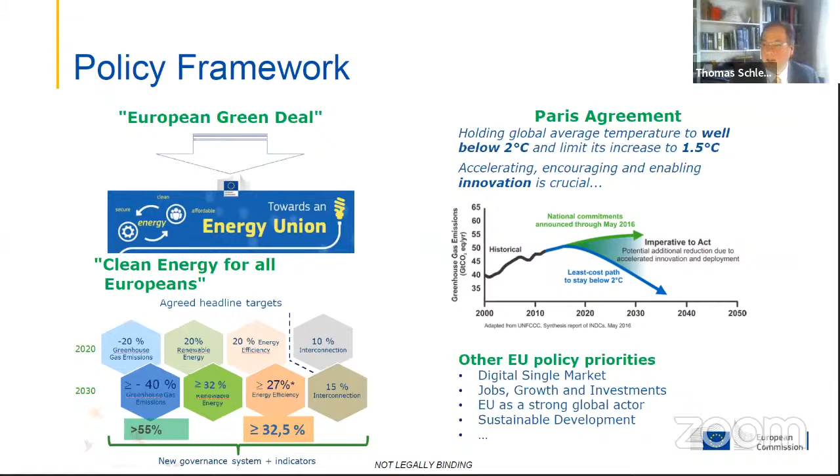I will not talk in detail about hydrogen, but of course, the European Union has a very specific strategy also in research and innovation on hydrogen with the Clean Hydrogen Joint Undertaking, and also bringing hydrogen in the global context. Recently, the Single Basic Act was decided. So please look at this information on the Clean Hydrogen Joint Undertaking and what the European Union does on hydrogen. Next, please.

Also internationally, there's now Mission Innovation 2.0. There is a specific mission on clean hydrogen now. What I will talk more about is, from the first phase of Mission Innovation, Innovation Challenge 5 on converting sunlight. And here the objective was to discover affordable ways to convert sunlight into storable solar fuels. A lot of countries teamed up to collaborate on these efforts. Next, please.

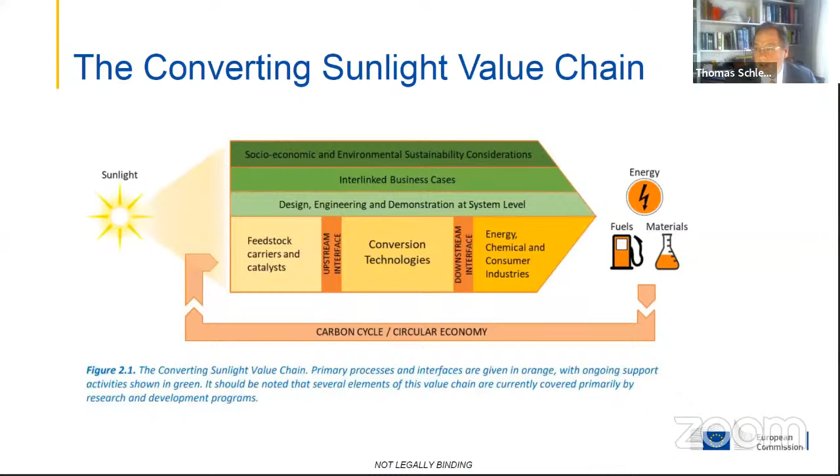And so several horizontal cross-cutting issues, and the increasing importance of carbon cycle neutrality and also a circular economy, also including resources and materials. Next, please.

The second study I would like to shortly introduce was a study commissioned by the European Commission about solar fuels research and investment. And this had the task to define the solar fuel value chain and to perform a techno-economic analysis of how research and innovation can contribute there. Next, please. I can only go shortly through that, but since you shared the slides, I invite people to look at that after.

Important: what are the investments needed? This is an important part in the roadmap, the importance of investments and also other policy drivers and important market drivers, like the carbon price. Next, please.

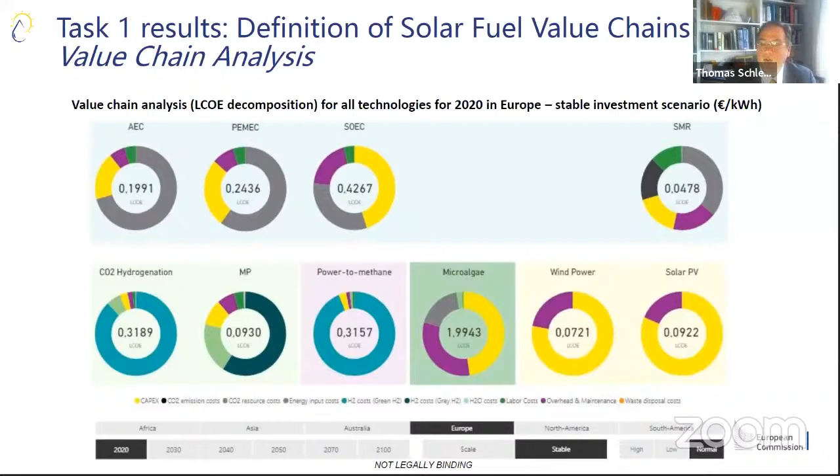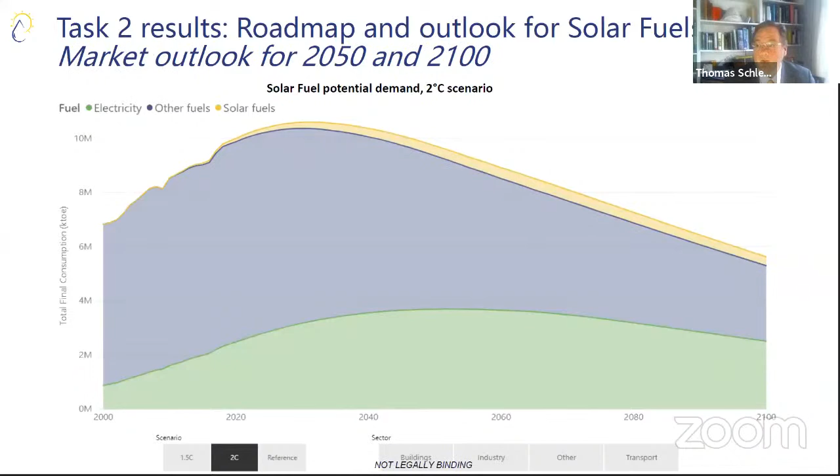Next slide, please. Now, very quickly, I think I'm close to running out of time, but very quickly about Horizon Europe, the current EU Research and Innovation Program. Next slide, please. If you think about solar fuels, of course, it is in pillar 2, where you have climate, energy, and mobility. However, please look also at other very interesting options like the European Innovation Council. Then, of course, there's pillar 1 with all, let's say, the bottom-up research, which is applicable to this as well. And you also have other actions in pillar 2. So please really look at what is available in the Funding and Tenders Portal.

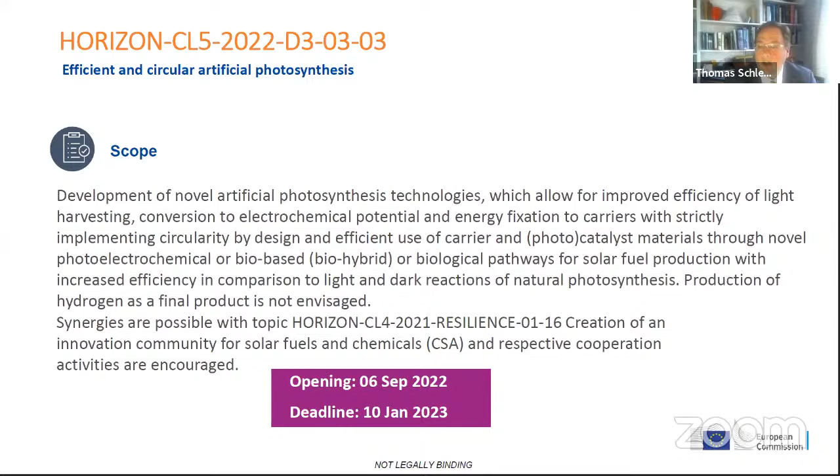Next, please. Only very quickly, there are 2 topics in this work program currently which might be of interest to you. One on efficient and circular artificial photosynthesis. This is a development, so lower TRL project. Next, please. And one on direct renewable energy integration into process energy demands of the chemical industry, where you've seen in the text that artificial photosynthesis is mentioned and direct solar thermochemical conversion as one of the possibilities. Next, please.

Thank you very much for your attention. And I hope I could give you a short overview that there's a lot of material you can look at to also see research and innovation and what the policies are at the European level. Thank you. Thank you very much, Thomas, for giving such a comprehensive introduction, and your keynote about what is happening and what you are doing to make sure that the right R&D pathways are followed in solar fuels and solar chemicals. So thank you very much for being here with us today and for your presentation.

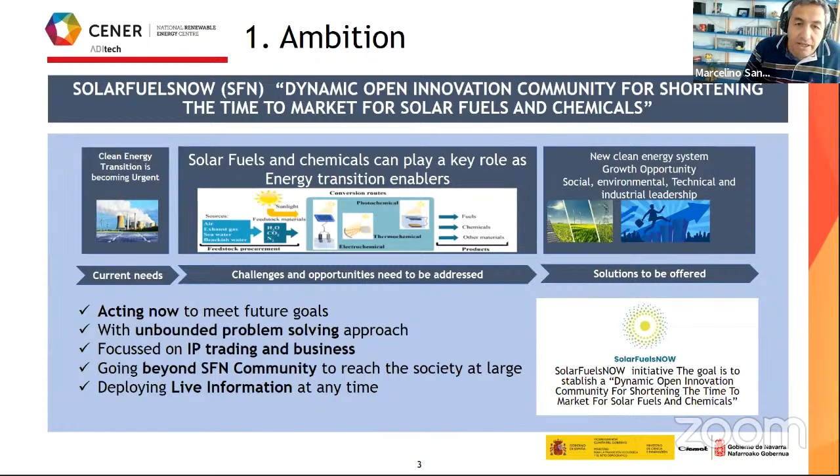So our initiative, Solar Fuels Now, will act as a bridge to connect this research with the final application and growth. In the end, this is the main goal. How are we going to do this? We will set up a large-scale R&I initiative with a dynamic innovation ecosystem through rigorous, inclusive engagement of all stakeholders. This is not easy, so we need to involve everybody to shorten time to market. This is important, and we want to achieve an actual impact of solar fuels in the energy transition.

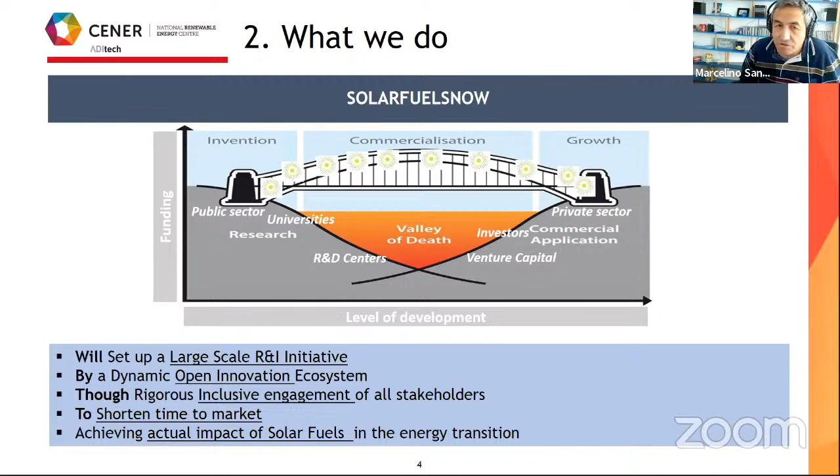And what do we expect from you? The truth is that we need you. The involvement of every player is essential for this initiative to work efficiently and to really convert this opportunity into business and leadership. So we want all of you, not only the speakers, attendees, organizers, etc., to be committed to our goals and share your knowledge, expertise, ideas, ambitions, concerns, and your view in the field. We need you to be the soul and the heart of this initiative.

We, as Solar Fuels Now, are just a catalyst to enable these open innovation activities. And we really appreciate you being actively involved in this first event. I want to thank you for coming, and I want you to enjoy this event, and please be active. Let us know your thoughts and try to bring added value to this initiative. Thank you very much.

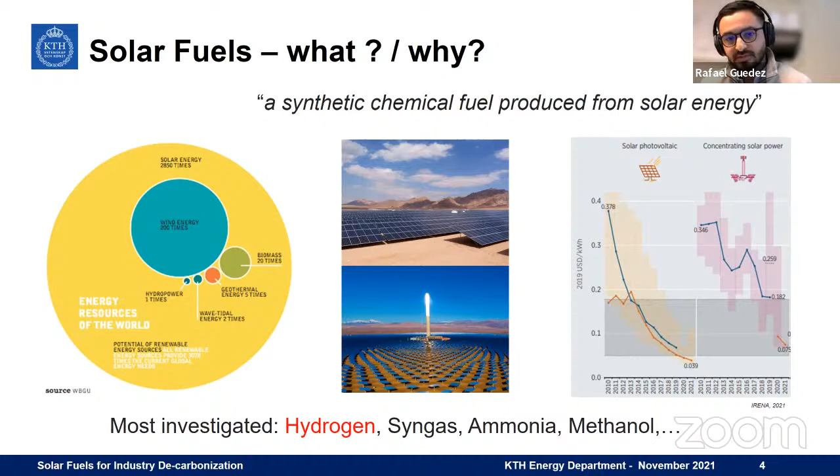And when I'm asked why we are looking into this, Thomas explained very clearly we need to decarbonize, and now we have very good momentum, not only because the amount of energy we have from the sun is enormous, but also because the technologies we have today to harvest solar energy are cost competitive, regardless if it's solar photovoltaics, concentrating solar, or direct sunlight use. Among the most investigated fuels, we have hydrogen, syngas, ammonia, and methanol. I will come to that.

So maybe the key message here is that should we move to a hydrogen-based economy, we need to not only look into decarbonizing the production of hydrogen, but also expand the demand and make sure we have more uses for hydrogen in industry.

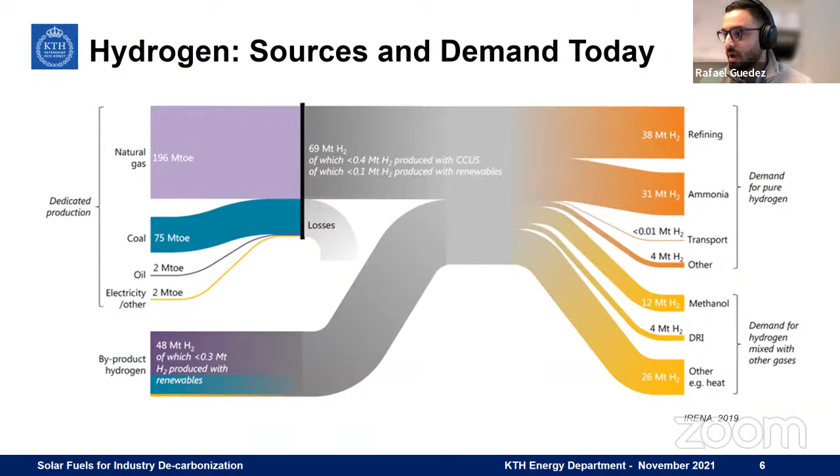However, having said that, we still see that fossil hydrogen will still be cheapest unless we change our policies or become more aggressive. The demand will increase, and that will be mainly driven by green hydrogen cost reduction, but also policies that need to happen to drive existing demand and new infrastructure.

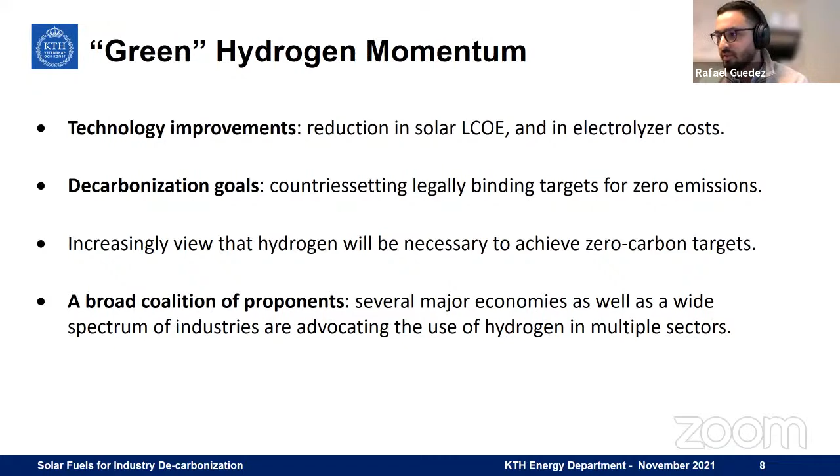Now, this has many challenges, like I already briefly touched upon. First and foremost, today hydrogen is still entirely supplied almost from natural gas and coal. Besides low temperature electrolysis, most of the other processes are yet immature, and we're going to need them, as I'll come to.

Producing green hydrogen is still costly, even from electrolysis, and it also requires vast resources - electricity, water, land, etc. So all of that needs to be addressed from a technical point of view. Furthermore, once we have green hydrogen produced, it is difficult to store and transfer, so we need a lot of focus on technology development in how to manage this.

And here is an opportunity actually for solar fuels, which can serve as a storage carrier besides being a final product itself. The development of hydrogen infrastructure today is also slow, and it might be one of the reasons why we're holding back adoption, even though some industries are interested. In order for hydrogen to be more widely used, we need to move from the typical use in oil refining and ammonia, and that needs to be driven by policy to drive demand and infrastructure.

Now, this is what I want to talk about mainly: how can we use hydrogen in industry? I particularly focus on the case of Sweden, which is our experience and background here. In industry, particularly in Sweden, we have a good example of how hydrogen can be used in the iron and steel sector as an energy source and as feedstock.

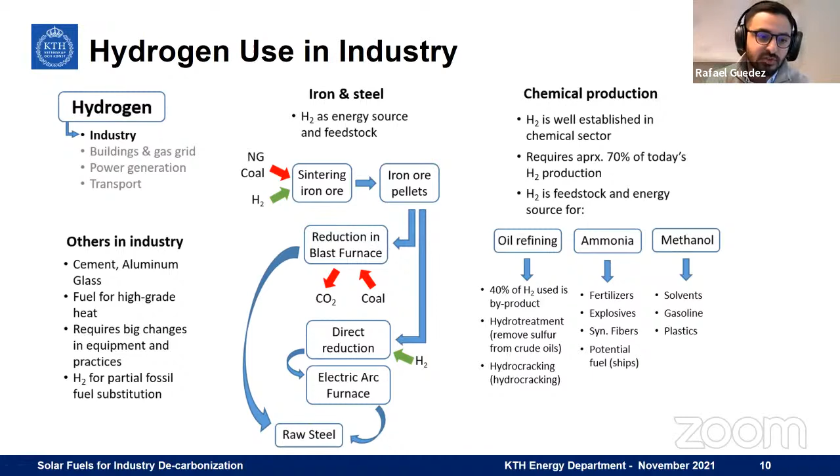Similarly, in chemical production, hydrogen is already well established, as I said, for refinery and ammonia. Today, what we see is that hydrogen can also be further exploited for ammonia, but also for methanol and other products derived from methanol. In other industries like cement, aluminum, and glass, hydrogen adoption is also possible, but they require high-grade heat. The one challenge we see is that these industries have already invested in their furnaces and processes, and changing to hydrogen requires big investment.

Hydrogen, besides potential use in industry, has an important role in transportation, and that's one of the key focuses. Even within transportation, I want to focus your attention on the different paths forward. One is clearly converting hydrogen through Haber-Bosch processes with nitrogen to produce ammonia, helping decarbonize the shipping industry. That plays a very important role.

The second path relies more on heavy duty and long haul transportation, not necessarily cars, since there it could be seen as expensive and hard to store. But in long haul and heavy duty transportation, hydrogen can play an important role. Furthermore, in solar fuels, converting to fuels like syn diesel or syn kerosene by combining with CO or CO2, we have the opportunity to decarbonize the aviation industry as well. These are sectors that can be transformed by the adoption of hydrogen if we move to more competitive solutions.

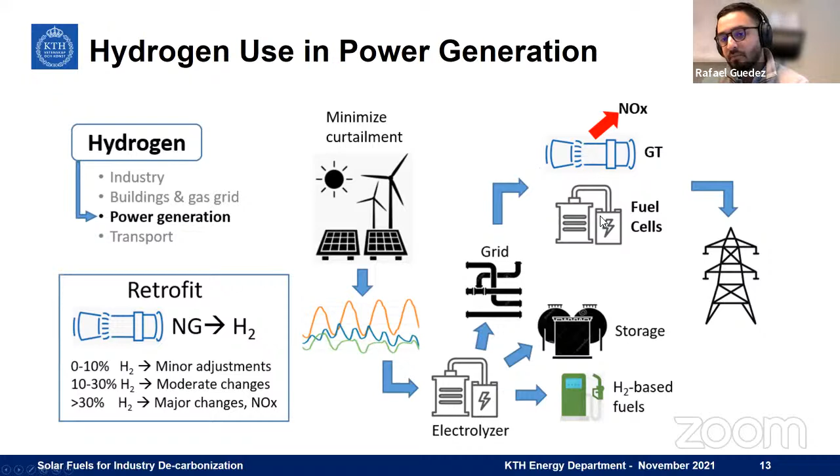With that picture, I want to come to this one, which is: okay, how are we moving forward?

Oh, I was kicked out. How strange, because we haven't touched anything. Go back, please—can you share again? Okay, I'm back, yeah, apparently.

In the case of Sweden, the example of steel is not the only one. I don't want to go through all of them, but different companies from the refineries and chemical sector, together with companies from the steel sector and the agriculture sector, are trying to adopt hydrogen by putting forward pilot projects leading to biofuels, synthetic fuels, and actual technologies for reduction of smelters using hydrogen in steel making, etc. There are a number of applications where hydrogen can serve to decarbonize the industrial sector, and companies are moving forward.

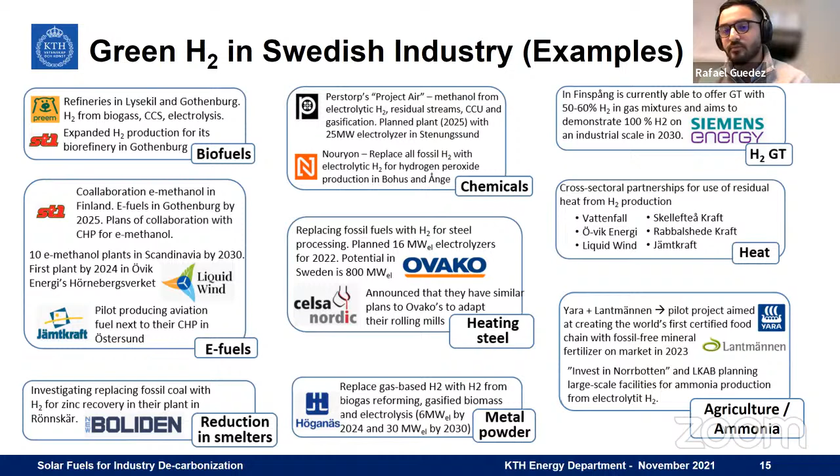So my talk was a bit of an overview of what we actually teach, but I wanted to give some key takeaways here: solar fuels can play an important role in decarbonizing the sector, especially transport and industry. Hydrogen is the most investigated solar fuel, but not the only one. There are many paths for producing hydrogen from the sun, not just electrolysis.

Many others are needed and could be more cost efficient depending on where we are and the resources available. Solar fuels are still costly, and it's hard to store hydrogen and transport it. This is actually an opportunity for solar fuels, perhaps to act as a liquid storage carrier.

By 2050, with the current policies that we see from different compilations of studies, green hydrogen can reach up to 50% of the hydrogen demand, and might not be sufficient. Therefore, we need policies and awareness to drive the adoption and techs sustainably.

Coming back to Marcelino's initiative, I think we need solar fuels now. I wanted to finish with one example.

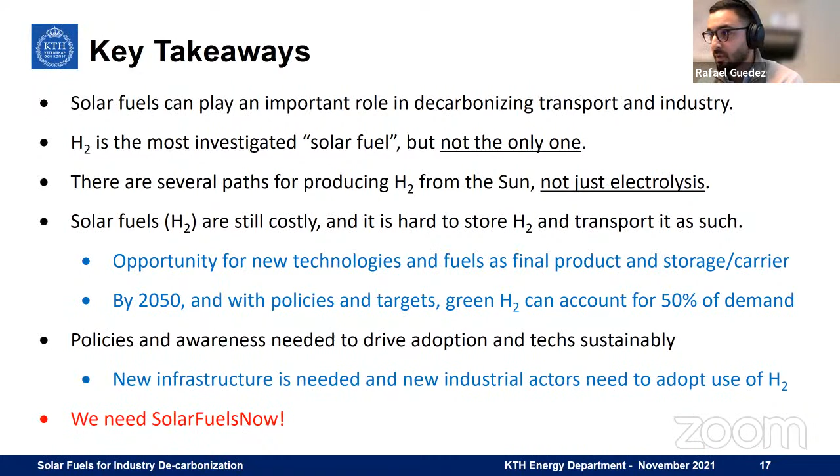What we do at KTH, or in my group at least, we are part of a large European project where we look into a megawatt scale demonstration of how to integrate thermal power units with renewables. It's a large consortium, which I also try to bring to this initiative, where we look into new components to make this happen.

In our group, we also look into different system analysis aspects, and what we see in terms of future technologies, I think there's a large potential, a lot of focus on electrolysis, and a lot of focus on PEM, driven by the reduction of cost of PV. But I believe that solid oxide electrolysis at high temperature combined with CSP can also play an important role there.

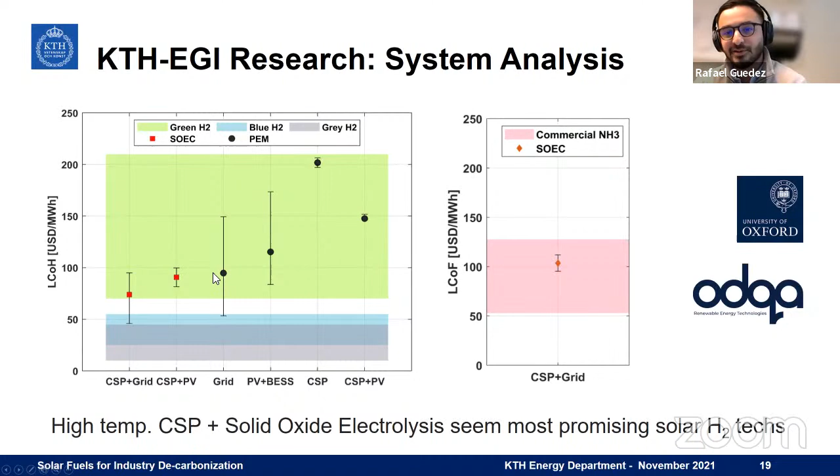I just wanted to bring it here to say that it can be very cost competitive, provided that a number of assumptions here are met. So with that said, thank you very much for the invitation, and here's my email for any questions.

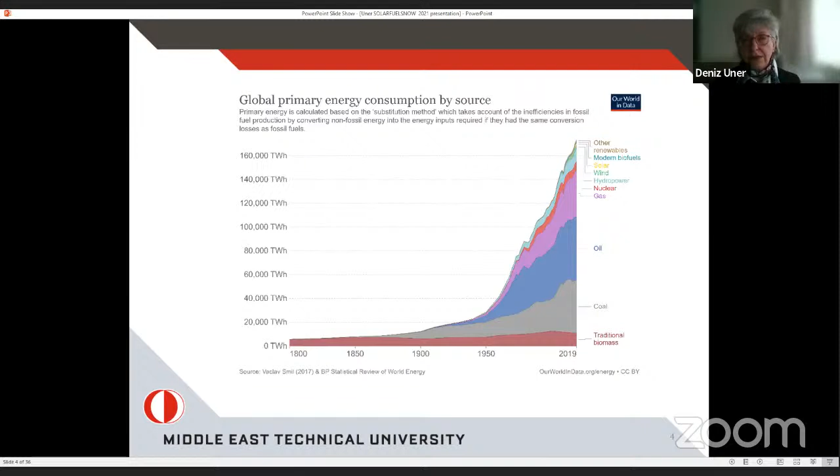Now, when we look at the scale of the energies, in order to bring it down to a meaningful reference frame, if you take the annual fossil fuel consumption in 2019, this is 136,000 terawatt hours. Conversion into basic energy units makes it a 10 to the 20 scale. So a reference frame for comparison is needed. So I will be dramatic about the reference frame, and I will show you the Hiroshima atomic bomb. Its mushroom rose 16 kilometers after it exploded, and I think it is going to be important when we are analyzing our present-day energy consumption habits.

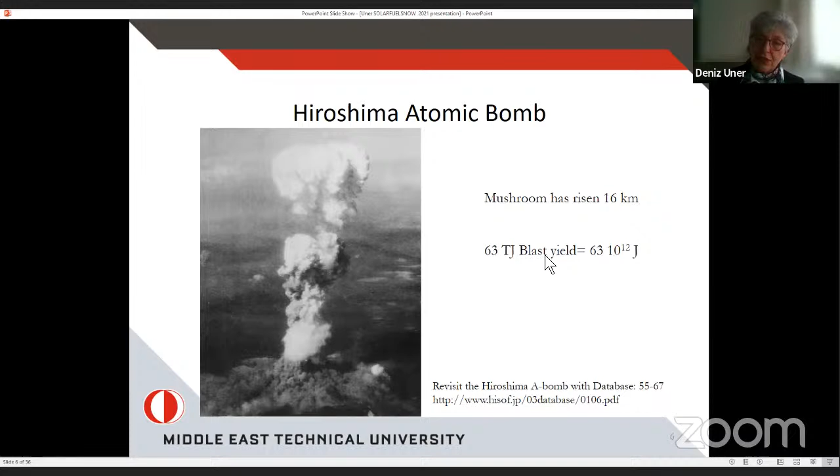It's debated, but the most recent publications say that a 63 terajoule blast yield was discharged to the environment. Now, when we take the annual fossil fuel consumption and compare it with the atomic bomb blast yield, we see that our consumption is the equivalent of 15 atomic bombs per minute. So where does this energy go? This energy goes into the environment, into the atmosphere, and we have to really consider how much heat we are releasing to the environment in addition to the carbon dioxide and the greenhouse gases and their impact on the environment.

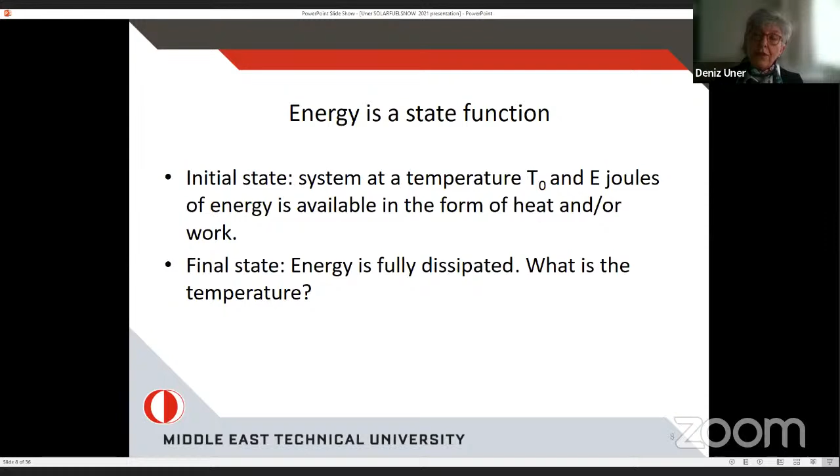Now, when we do the simple calculation by taking energy as a state function, we are going to take the initial state of the system at a temperature T0, and we are going to have an arbitrary E joules of energy available in the form of heat and/or work. But as we know from the first and second laws, any energy is going to dissipate as heat. So we are going to take these numbers and convert them to heat. And what is going to be the temperature gradient if we take this energy consumption of only the fossil fuels and release it to the atmosphere?

We take the energy consumption, take the atmospheric mass, assuming atmosphere as a mixture of nitrogen and oxygen with an average molecular weight of 29 grams per gram mole, with an average ideal gas heat capacity of 7/2R, I calculate a temperature change of 0.17 degrees Celsius per year.

So we just take the fossil fuels, we use them as thermal energy source by driving our cars, in thermal power plants or in any other form of thermal energy generation, we induce 0.17 degrees Celsius a year. So this number is 10 times greater than the climate change values reported in the open literature. The climate change reports indicate that it is 0.17 degrees Celsius per decade.

But remember, my calculation only included a sensible heat change in the atmosphere. It doesn't take into consideration glacier melting, which is a latent energy change. So we know that 267 gigatons of ice is melting a year. This accounts for 0.8 × 10^20 joules of that 4.9 × 10^20 joules of energy, and warming up of surface waters and increasing evaporation condensation rates can account for the rest.

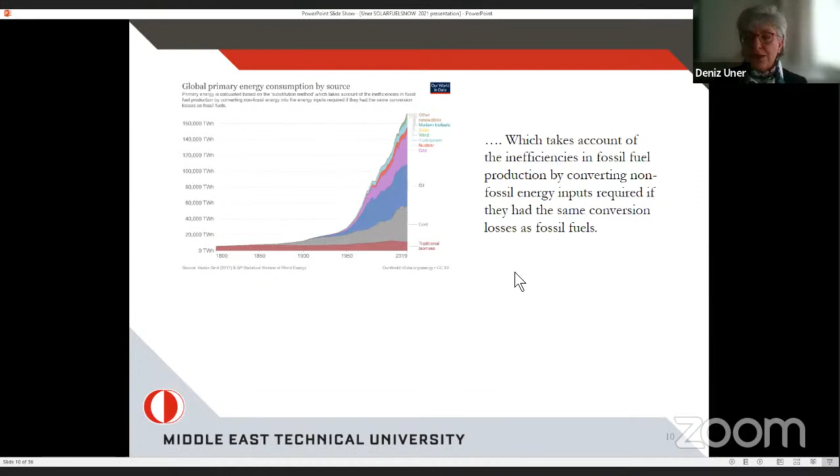Now, when we just reread the fine lines, it says that which takes account of the inefficiencies in fossil fuel production by converting non-fossil energy inputs required if they had the same conversion losses as fossil fuels. So I just go back and make a really very crude approximation, as you will see from the numbers. Now, the crudest approximation that I can make for a passenger car is that it weighs 1,000 kilograms, while the passenger is about 100 kilograms. So this amounts to a 10% efficiency of simply using a car for the transportation needs.

On the other hand, when we look at the engine and chemical to mechanical energy conversion efficiencies in a car, we know that the typical numbers are within 10%. So driving a car is at best 1% efficient. So I think before we start discussing solar fuels, we have to think about our habits and how we consume energy and how we use transportation to induce global warming.

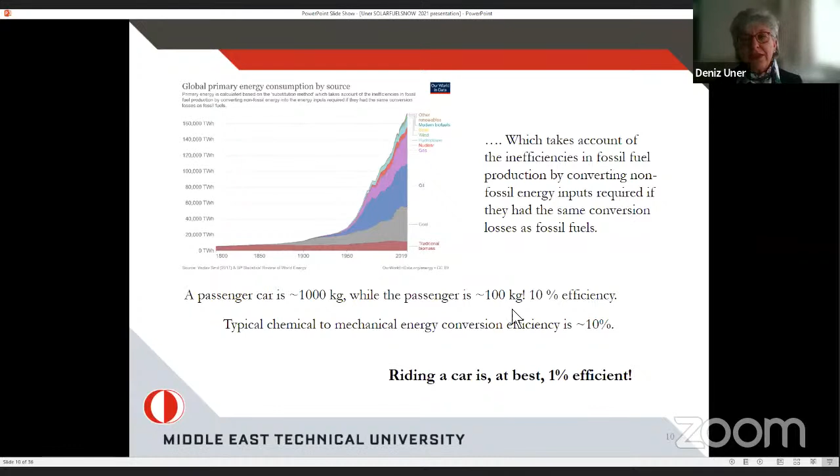We have to readjust our habits and our notions, and we really do not address present-day use of fossil fuels and trying to find solutions and replacement for the fossil fuel use of today's 1% efficient technologies. I think we have to address this in addition to what we are addressing in terms of solar fuel production.

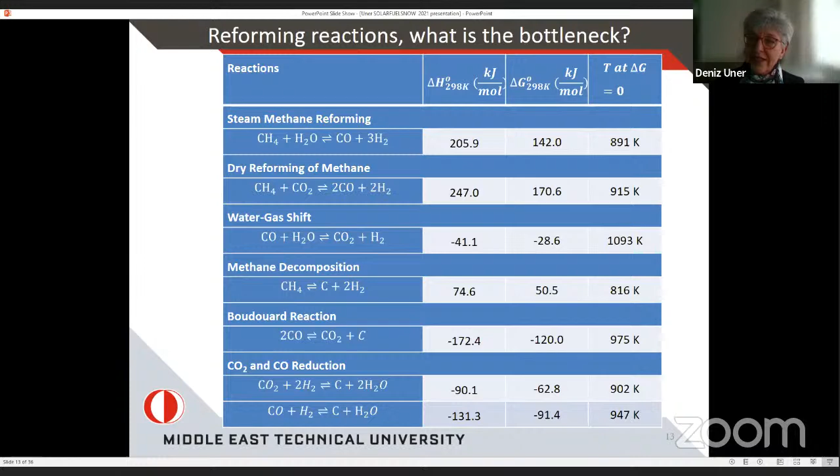So now after I set the stage, the next question I'm going to ask is if we can selectively produce conventional fuels from methane, water, and carbon dioxide, of course, by using solar energy. Now, the traditional method for synthetic fuels is going through syngas-related reactions using Fischer-Tropsch and methanol synthesis and ammonia synthesis, etc. So the bottleneck of the reforming reactions is that they are endothermic, and also there are selectivity issues. Therefore, we need temperatures in excess of 800 kelvins.

So those temperatures are going to bring our system not into a reactor, but a heat exchanger to be designed. And there's no need to optimize a catalyst. We have to optimize heat transfer. So this is a problem that we need to solve, whether we are going to do solar fuels, solar energy utilization or otherwise. And also we must manage coke buildup. Coke may be a very valuable product at the end. We have to really plan for that also.

Now, also we have to pay attention to the second law boundaries because when we sequester carbon dioxide for solar fuels, and when we do it with terrestrial thermal energy, we are violating the second law for sure. So if we use solar energy to do dry or steam reforming, we are actually storing solar energy in chemical bonds. Furthermore, if we are using even photovoltaics passing through some thermal routes, we are accumulating thermal energy in the atmosphere, and we have to be very, very careful.

So now what we have done was using concentrated solar energy, solar thermochemicals to produce syngas by steam reforming. What we used were quartz windowed reactors, preliminary designs that by themselves were rather heavy, and we have used a solar tracking system with 4 mirrors of 70 centimeters in diameter.

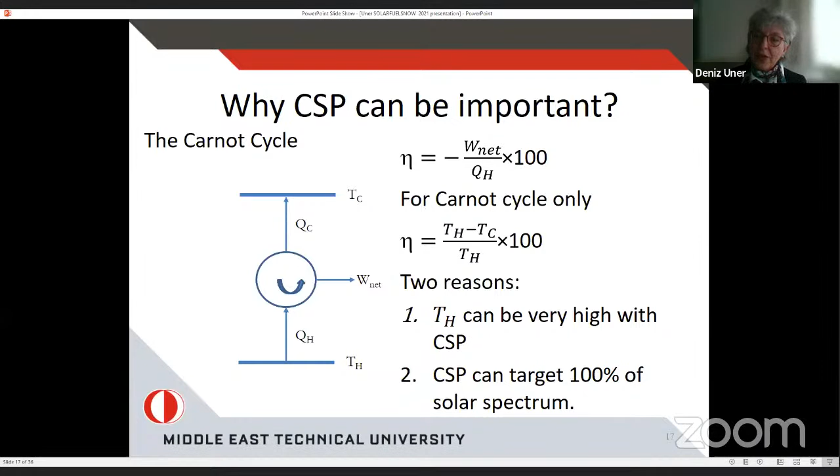Now, there was a question in the earlier sessions about why concentrated solar power can be important. I would like to answer this at this moment before moving further. There are 2 reasons why concentrated solar power is important. One is because it addresses directly the Carnot cycle efficiency, that we are achieving very high temperatures using concentrated solar power, even with those smaller mirrors. And also, concentrated solar power can target 100% of the solar spectrum because it is focusing.

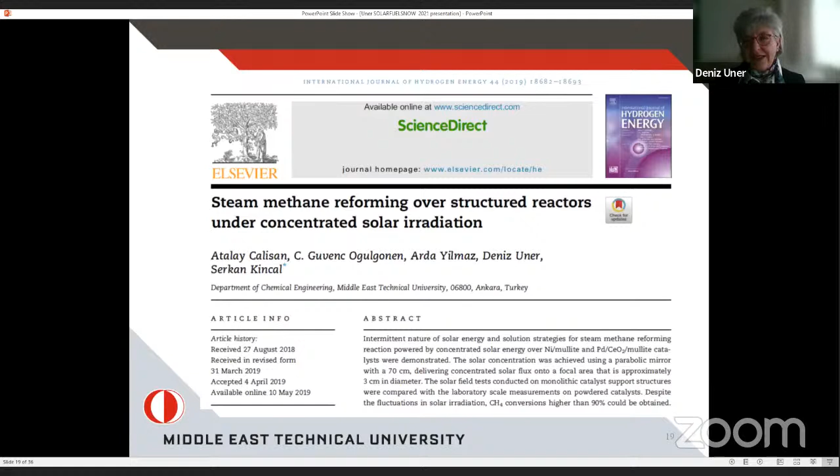So after using that system, we have tried solar thermochemical hydrogen production, which I think is a difficult and surmounting task, given the fact that direct hydrogen water splitting requires really very, very high temperatures. But when we go to steam methane reforming, we have achieved methane conversions greater than 90%, of course, within the intermittency of the solar energy available to us.

Now, in the next few minutes that is left for my presentation, I would like to just share a dream, if I may, that if we can mimic to produce chemicals from sun, water, and carbon dioxide, if we can do photosynthesis. If we cannot produce glucose as efficiently as a plant cell, maybe we can target producing methane. Now again, thermodynamics is the rule that we should just follow.

When we look at the carbon dioxide reduction reactions with respect to the free energy change in kilojoules per mole of hydrocarbon product, we see a large variety in comparison to water splitting. But then when we scale it down to kilojoules per mole of oxygen produced, we see a very uniform picture, and that uniform picture lines up very well with water splitting. So in other words, water splitting is the energetically most demanding reaction. Once we manage that, we manage the rest of the chemistry fairly easily.

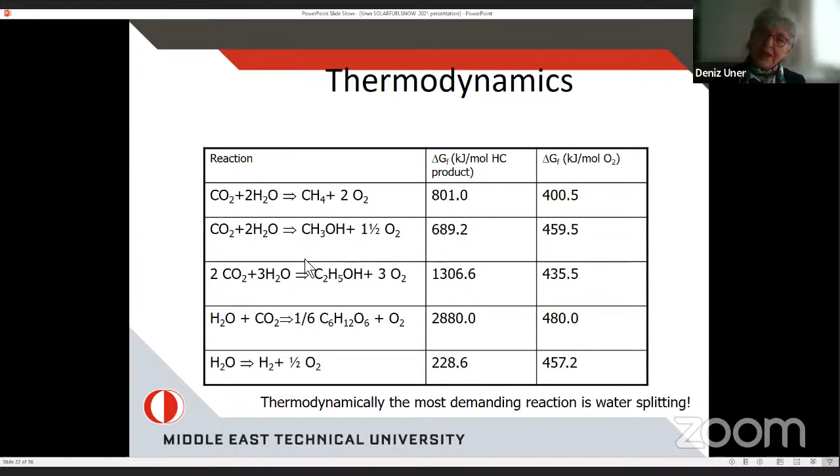So the intermittency was a question in the previous session, and this is what the plant cells do. They do intermittent operations. They do things in confinement. They confine reduction and oxidation in different compartments, and they carry out events one at a time. And the problem that we have to solve here is the oxygen problem. In the interest of time, I will skip those and go to a reference that I share with you, not ours, but from the literature.

You will find a lot of them. The plant cell uses a cluster, and the structure and framework of this cluster in the photosynthetic plant cell is a very hot subject in photosynthesis research. This cluster is the water oxidation cluster, and here the removal of oxygen takes place in a sequence at 298 Kelvin. And oxygen has the strongest bond in the molecules, and oxygen release is the most difficult step in water splitting, also in reforming reactions.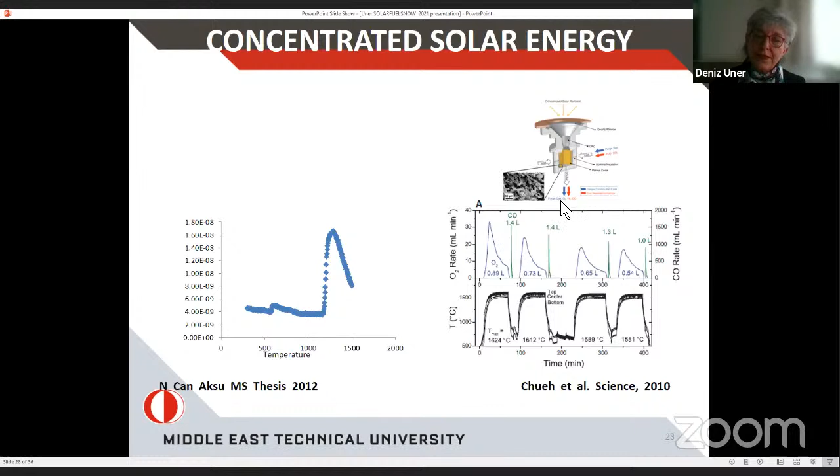So just to give you another example, a solar thermochemical unit switches between 1500 degrees Celsius and 800 degrees Celsius in order to achieve the water splitting or carbon dioxide reduction, while this plant cell carries out this oxygen release at 298 Kelvin. And this is the focus area where we must focus our attention, because once we solve this, we solve all the other energy conversion problems.

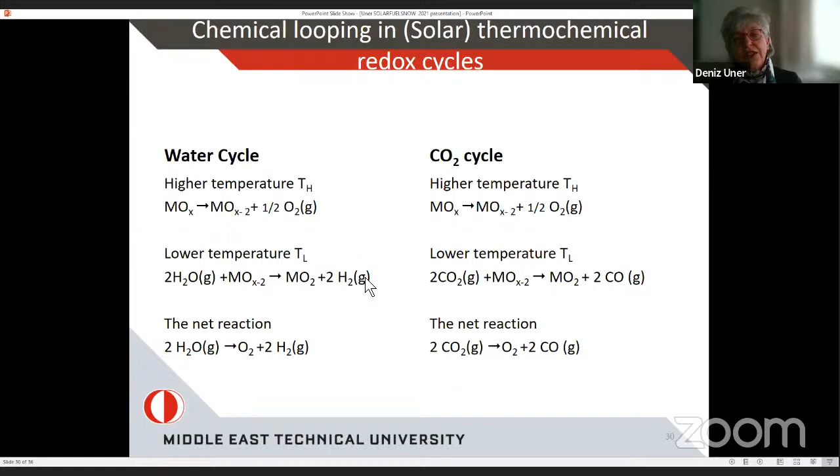So now let me just give you very briefly, 2 minutes left, the water cycle and CO2 cycle that the solar thermochemical process uses. For a water cycle, we take a metal oxide, we heat it up to 1500 degrees Celsius in order for this metal oxide to release its oxygen. And then we have to lower the temperature in order for the water to donate its oxygen so that we can produce hydrogen.

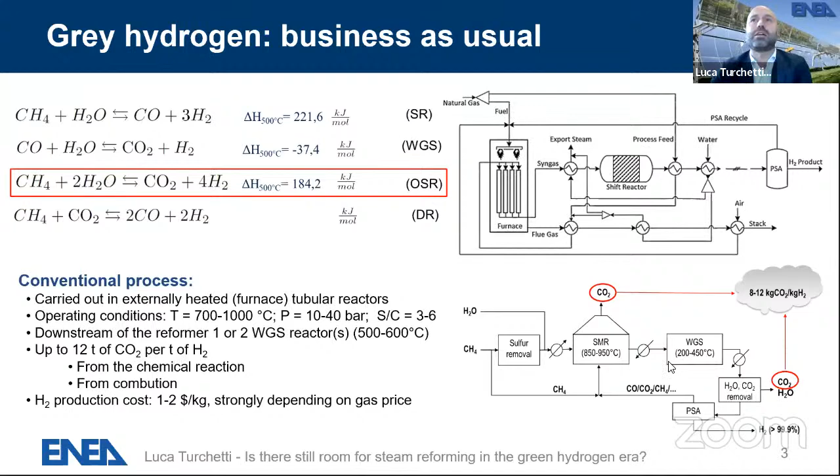The operating conditions are high temperature, up to 1000 Celsius degrees and even above in some reactors, and high pressures up to 40 bars, and usually it takes 2 reactors to carry out the whole process. One first reactor operating at high temperature, and 1 or 2 more reactors downstream operating at lower temperatures to further push hydrogen production. So today, reforming is definitely considered the bad guy in hydrogen production.

And when politicians, policymakers, media, or the general public talk about green hydrogen, they all think about water electrolysis powered by wind and solar, which is definitely today the most mature approach to green hydrogen production, but definitely not the only possible approach. There is a wide spectrum of processes combining different types of renewable energy sources with renewable feedstocks that can be used to produce green hydrogen.

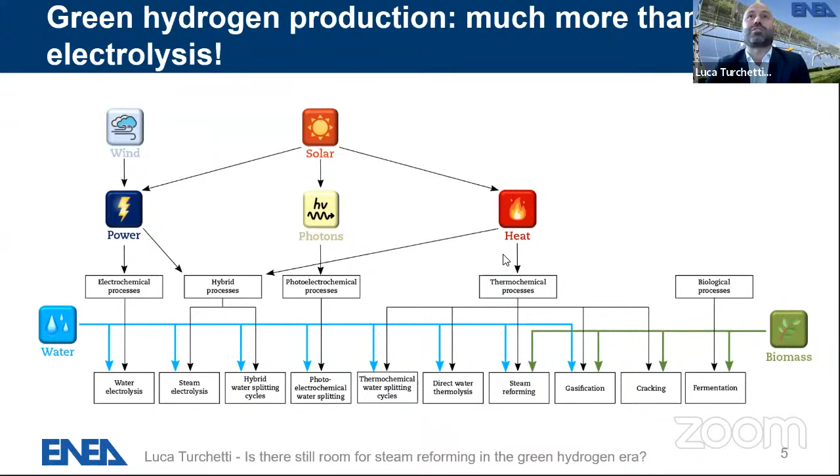And I would say that one of the reasons why steam reforming is necessarily considered as a gray hydrogen production method is that today we have this wrong idea that power can be green while heat is necessarily derived from fossil fuels, so it is not renewable. But as you could also tell by the previous presentations, it can also be produced out of sun, out of renewable energy sources, out of solar energy. And this is the case of CST technologies, concentrating solar thermal technologies.

And in particular, I would like to mention the innovative technologies in this field that have been developed by Enea starting in the early 2000s, which are based on the use of parabolic troughs, linear concentrators, and the use of molten salts, not only as a heat storage medium like in today's commercial parabolic trough plants, but also as a heat transfer fluid and heat storage medium with a 2-tank direct approach.

Enea has been developing this technology, and these activities led to the development of a first 5 electric megawatt plant in Italy in 2010, and a first cogenerative demo plant in Egypt, producing 1 megawatt of electric power and 250 cubic meters per day of desalinated water.

What I would like to emphasize here, since the issues related to the intermittency of solar energy have been correctly highlighted several times before in the discussion in this workshop, is that this technology can rely on an existing commercial and consolidated thermal storage solution that allows to store the solar heat in the existing CSP plants up to 17 hours at full capacity.

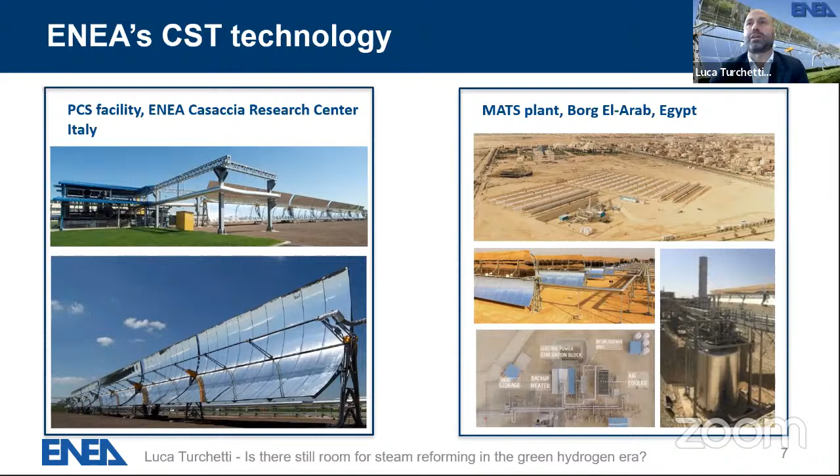So here you see a couple of pictures of our facilities in Enea's research center in Rome, where we have a full-scale parabolic trough concentrator which we use to test components of the solar field. And here you see pictures of the plant that has been built within the MATS project in Egypt. So you see an overall picture of the plant, the solar field, the innovative single thermal energy storage tank, including an integrated steam generator.

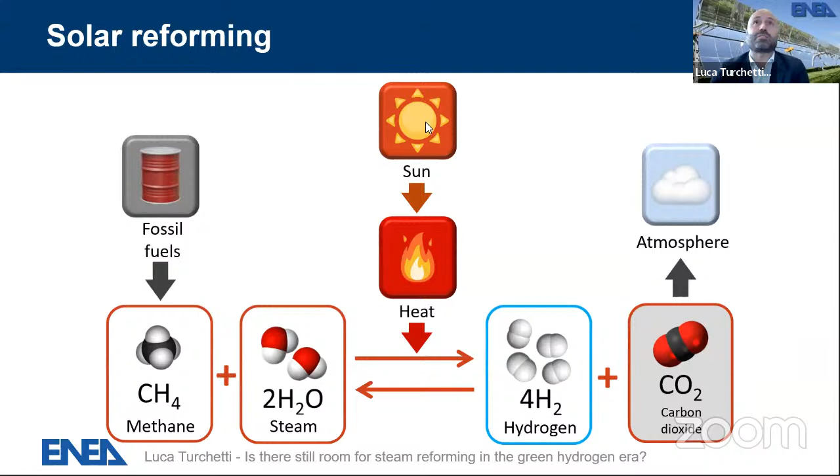So how can we use this concentrated solar technology to bring steam reforming out of the gray hydrogen era? Of course, this simple scheme represents how we are producing hydrogen by reforming today. So we use fossil fuels, we produce carbon dioxide both in the flue gas and as a product of the reaction. This is rejected into the atmosphere. Solar reforming of fossil fuels could be a first step towards the full decarbonization of this process, just by replacing the heat source with solar energy, with concentrating systems.

And finally, if we use a renewable carbonaceous feedstock for feeding our reforming process, for example, by producing biogas out of biomass and then reforming biogas, we can have the whole process as net carbon neutral, or even carbon negative in case we apply some CCS process downstream of the reforming process.

There are basically two main approaches. One, which is more widely considered, is carrying out the reforming at the usual high temperatures. And this can be achieved with solar energy by using point focusing technologies, for instance, solar towers, with two possible approaches: either by building an integrated receiver reactor in which the concentrated solar light is converted into heat and directly used by the catalyst to carry out the process, or you can use a heat transfer fluid and then carry out the reaction in a separate reactor, which is not necessarily located close to the receiver of the CST system.

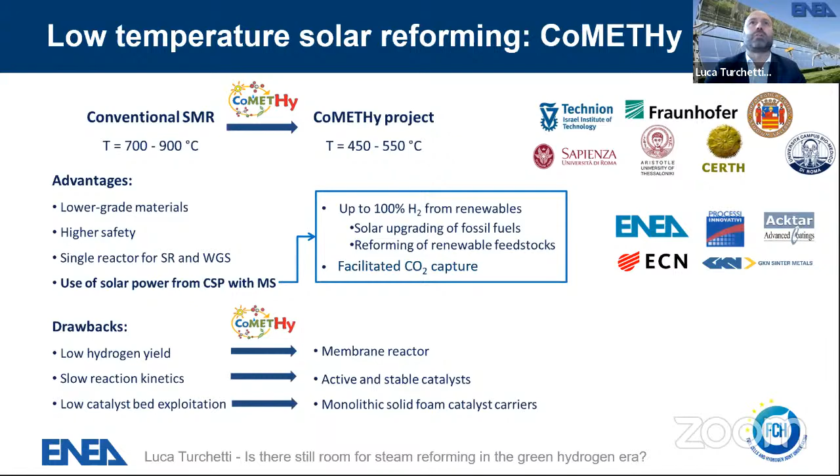So in order to address all these issues related to the catalyst, within the project we developed active and stable catalysts at lower temperatures, and also a monolithic solid foam catalyst carrier, which allows for improved radial heat transport.

And we have thermal storage, which allows us to operate the reactor even when solar radiation is not available. And of course, the heat from the solar field is also used to preheat the feed to the reactor, and also to produce the steam required in the system.

Also, the use of a selective membrane based on palladium to separate hydrogen from the reaction environment. And finally, all these components were included and implemented in a molten salt heated membrane reformer, having a nominal capacity of 2 normal cubic meters per hour of pure hydrogen, which was actually exceeded in the experimental campaign.

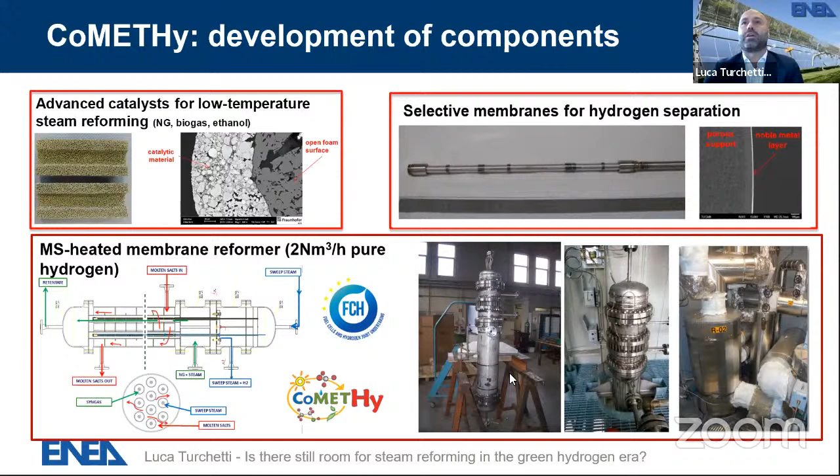So here you see some pictures of the integrated reactor before putting the insulation on. Some schemes explaining how the reactor is built. It is basically a shell and tube arrangement with a membrane in the inner part, and in the annular part of the tubes we have the catalyst.

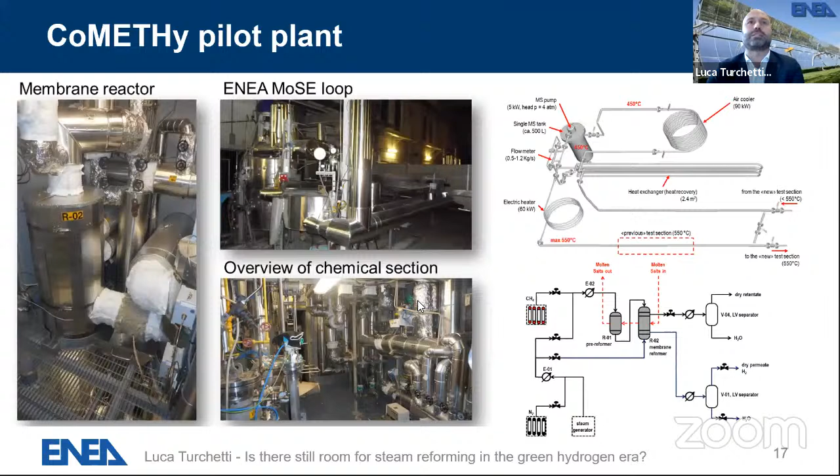Other pictures of the reactor and of the test loop in which the reactor was included to test it under an actual molten salt stream. I will just be very quick on the results we obtained.

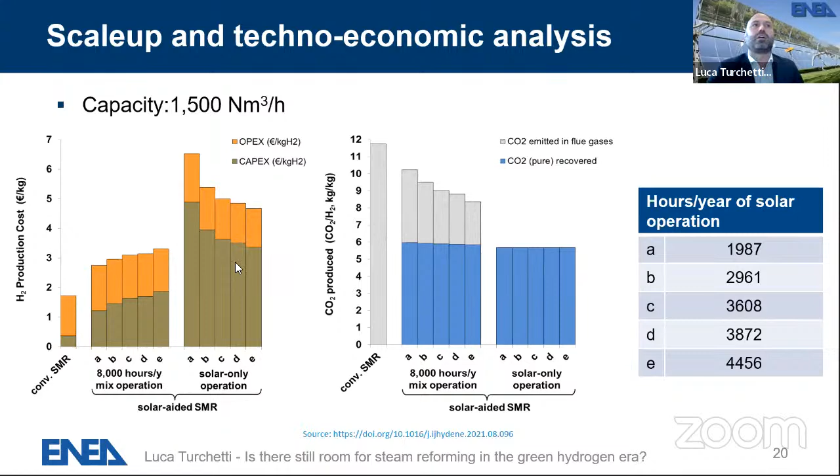And finally, we also carried out an economic assessment in a specific scenario, not yet optimized, for 1,500 normal cubic meters per hour of hydrogen. I want to show you either solar only or some integration with fossil fuels. We obtained hydrogen production costs that can still be optimized, and that can also be comparable in some cases with gray hydrogen production.

Also, I would like to mention that we are now working on a new configuration of this reactor, a planar configuration that can be possibly more compact and even more going towards a process intensification philosophy.

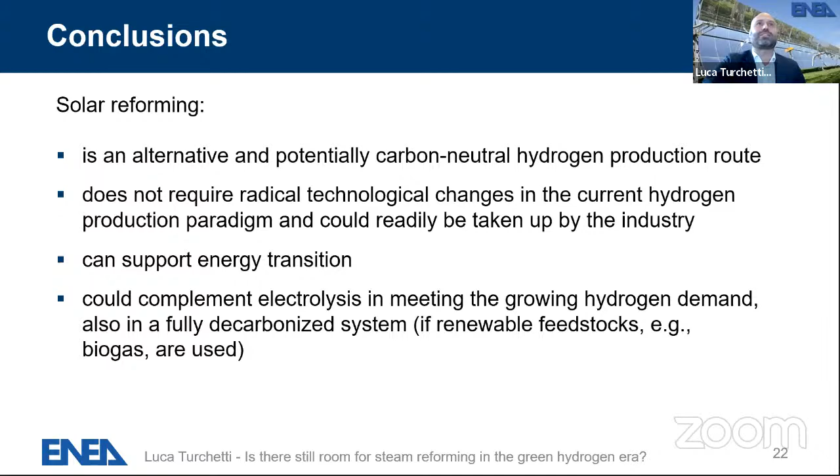I will skip the conclusion because I think the message is clear. I just want to steal some seconds more to tell you that within the Hydrogen TCP of the International Energy Agency, we are currently launching a new task focused on renewable hydrogen production, covering all the different processes I mentioned before, not only reforming, but also water splitting, electrochemical and thermochemical. So if you're working in this field, I really encourage you to go to the website of the TCP and check the information about this task in development.

And if you want to know more information, please fill in the new expert application form. I will be glad to give you more information and have you on board on this new task. So with that, thank you for your attention. Apologies for the delay, and of course I will be glad to take any questions later.

Oh, thank you very much, Luca. Very interesting. So next up would be Dennis Thomey. Yes, yeah, hello everybody. Hi, so the same, yeah, go ahead.

Yes, my name is Dennis Thomey. I'm acting head of department in the Institute of Future Fuels of the German Aerospace Center. I have been mainly working in the past on solar thermochemical cycles, especially the sulfur-based ones. And this brings me to my talk today.

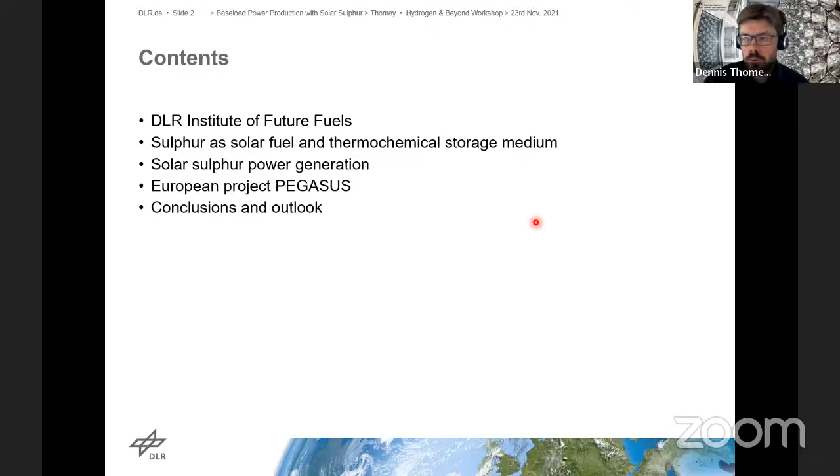The content will be: I will briefly introduce our new Institute of Future Fuels, then talk about sulfur as a solar fuel and a thermochemical storage medium, introduce the solar sulfur power generation cycle, then speak about the recently completed European project Pegasus, and give some conclusions and an outlook.

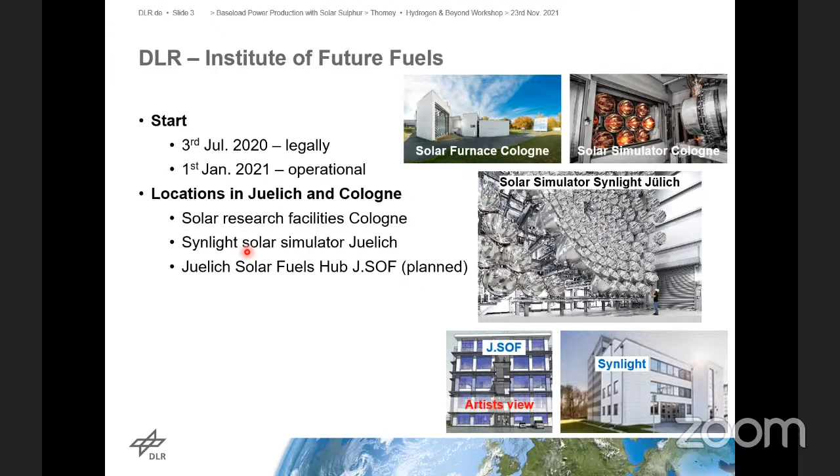So the Institute of Future Fuels started operation this year. It has large-scale infrastructure, first of all on its site in Cologne, a solar furnace and a solar simulator. And in Jülich, close to Cologne, we have the largest artificial sun in the world, the so-called Synlight. It is planned to further extend these facilities in Jülich and, for example, build something like a Jülich solar fuels hub in the future. Research topics are chemical and physical fundamentals, development of solar chemical processes, demonstration of these processes, and also the overall assessment.

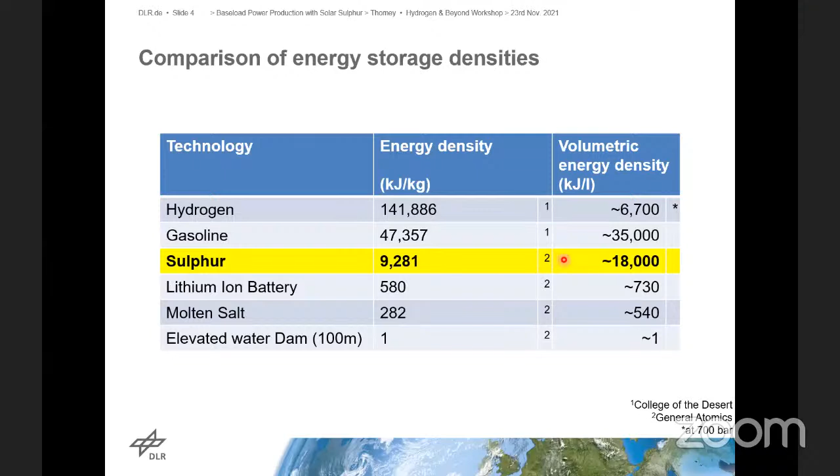So then let's look at sulfur as a storage medium. Here you see the mass-based energy density, and you see that sulfur is already coming quite close to gasoline and is definitely much higher than molten salts, which is used in CSP plants nowadays. The advantage of sulfur becomes even more obvious if you look at the volumetric energy density, where it is even higher than hydrogen compressed to 700 bars, which is state of the art today. Sulfur still has a much higher density here, and this is an advantage, for example, if you think about transportation on ships.

So let's look at sulfur in industrial processes nowadays. It is the raw material for sulfuric acid production, the world's most produced chemical, with an annual production rate of more than 200 million tons a year. Therefore, sulfuric acid is even an industrial measure for the development of countries, as it is needed for fertilizer production.

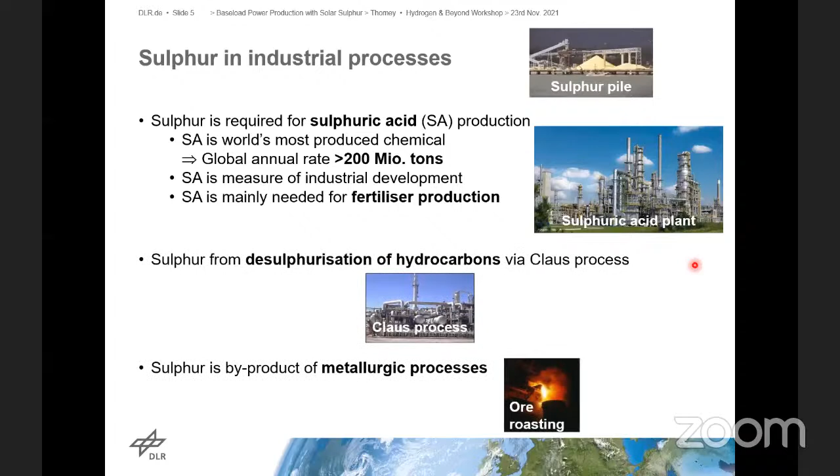Nowadays, the sulfur to make sulfuric acid comes from fossil sources: on one hand, the desulfurization of hydrocarbons via the Claus process, and from metallurgic processes like ore roasting. Here you see the world production in 2017, it was 80 million tons of sulfur. It is quite cheap at $111 US per ton, and as I said before, most of it comes from the desulfurization of hydrocarbons and also from metallurgic processes.

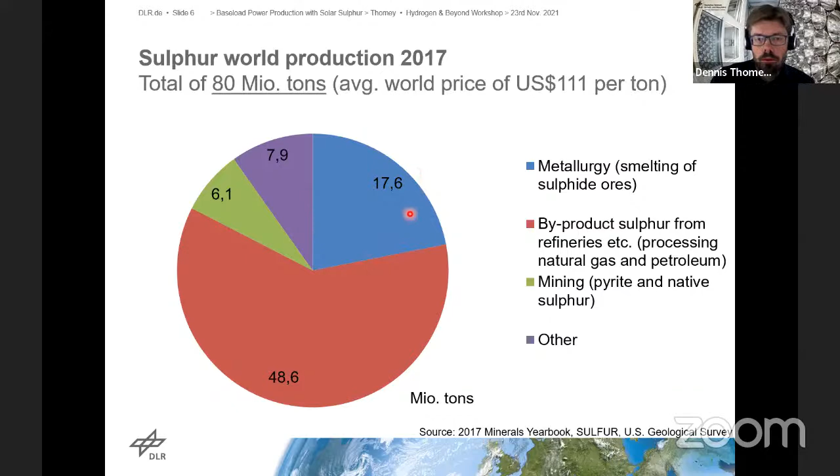Another advantage of sulfur, besides its high energy density, is that you can store and transport it very easily. This is important because it's needed for sulfuric acid production and has to be transported all over the world, either in solid or liquid form. In solid form, it is a powder or particles.

You can transport it on trains, trucks, or in ships. And if you heat it up to about 140 Celsius, it becomes liquid, and it can even be transported in pipelines, rail trucks, or rail cars.

So then let's look at the thermochemical cycle to make solar sulfur. The actual goal here is to start off with concentrated solar thermal and produce baseload electricity power, completely independent from the solar input. And how do we introduce the solar energy?

We use the well-known process of the decomposition of sulfuric acid, which first gives SO2. This sulfur dioxide is a toxic gas which can only be treated safely on site at a chemical plant. However, if you introduce the disproportionation of SO2, then you can come to elemental sulfur, which, as mentioned before, is the raw material for sulfuric acid plants already nowadays.

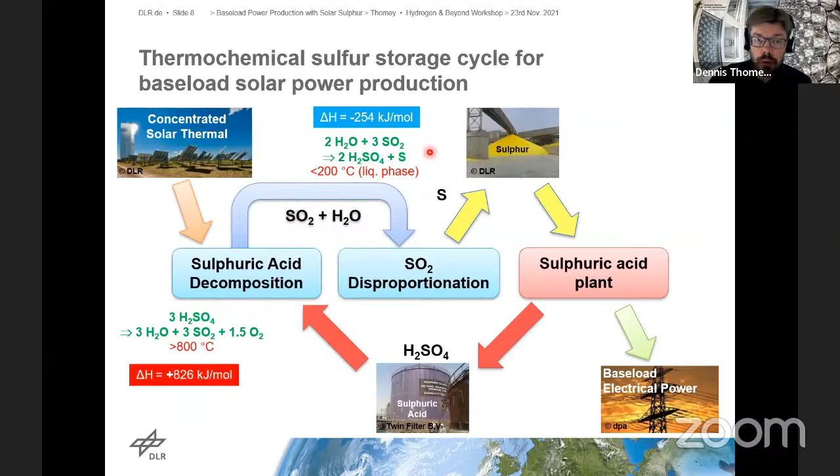Then we have this disproportionation reaction. In fact, we do lose a bit of energy because this reaction takes place at fairly low temperatures, which cannot be recovered so easily. However, from a technical point of view, this makes sense, as I mentioned earlier.

And then comes the conventional combustion of sulfur, which can take place at temperatures significantly above 1000 Celsius. And then you even come to higher temperatures here than you need during the splitting of sulfuric acid, so during the introduction of the solar energy.

And how do we want to integrate the solar energy? At DLR, we have in the last years developed the solar particle technology. Here we use conventional bauxite particles from the fracking industry. They are pretty good for solar applications, actually.

They are similar to sand, if you want. They have a high absorptivity for solar radiation. And if you heat them on a solar tower, the hot particles can be easily stored in insulated tanks, then used in heat exchangers, and then going to a cold storage are immediately available again for the solar plant.

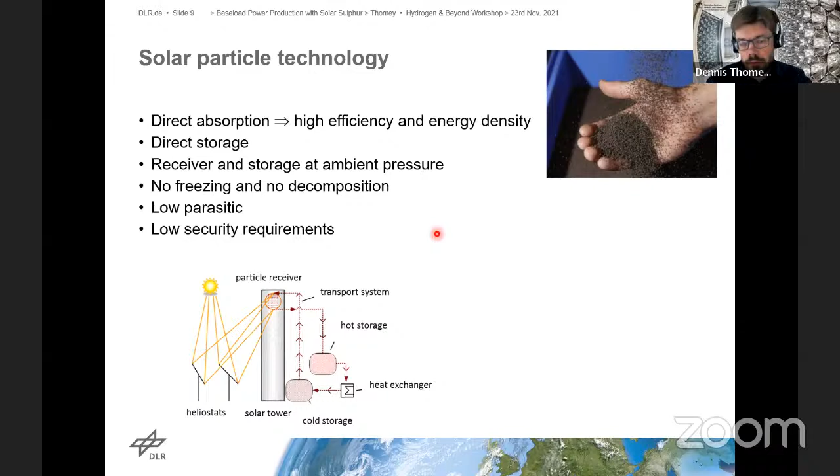And unlike molten salt, we do not have the issue of freezing of this heat storage medium. It does not decompose, it's very stable. We have low parasitics here, and also the safety requirements are significantly lower.

The technology developed at DLR in the last years is called CENTRIC, Centrifugal Solar Particle Receiver. It is something like a washing machine, if you want.

So the particles enter from the top, forming a dense film on the inner surface of this rotating cylinder through the centrifugal forces, and then the concentrated solar radiation enters into the cavity, is absorbed by the particles, and then we can gather the hot particles at the outlet of this receiver. Through the rotation speed we can actually control the mass flow through this receiver.

So let's take a look at the overall process. I will not go into complete detail here, just show you that we have this solar receiver, we have a hot tank and a cold tank for the particles. Then we have here the sulfuric acid decomposition unit.

This consists of vaporization of sulfuric acid, which is completed at about 400 Celsius, and then subsequent decomposition of SO3 forming SO2, which is then further processed in the disproportionation reactor to give elemental sulfur. And then we have here the sulfur burner to gain back the stored energy. We have two storage systems, for sulfur and for sulfuric acid.

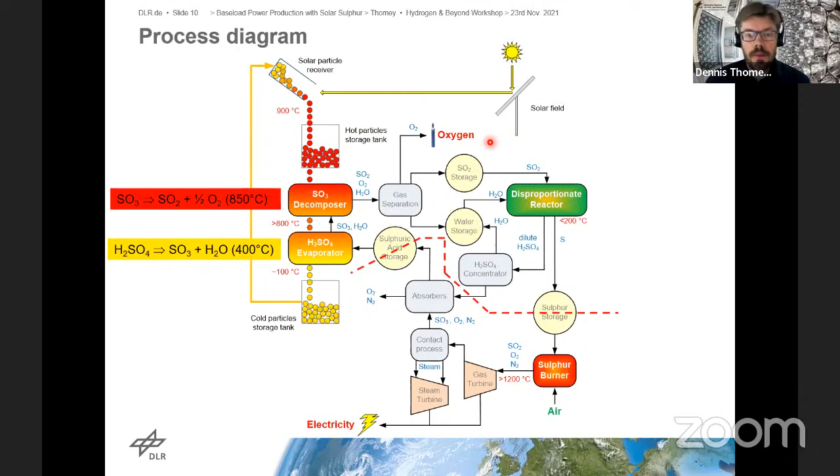And then depending on if the sun is shining or not, we are either producing sulfur or we are producing sulfuric acid. Another feature of this cycle can then be seen here, meaning that you could envision producing the sulfur in the desert as a good solar site, then transport the sulfur to a non-solar site like Germany or wherever else, and there produce the sulfuric acid and also the baseload electricity.

So as you might see, this can be very easily integrated also in already existing sulfuric acid technology. So let's take a look at the state of the art here. Usually we have refineries which produce sulfur as a byproduct. The sulfur is transported to the sulfuric acid plant, which produces acid and electrical power.

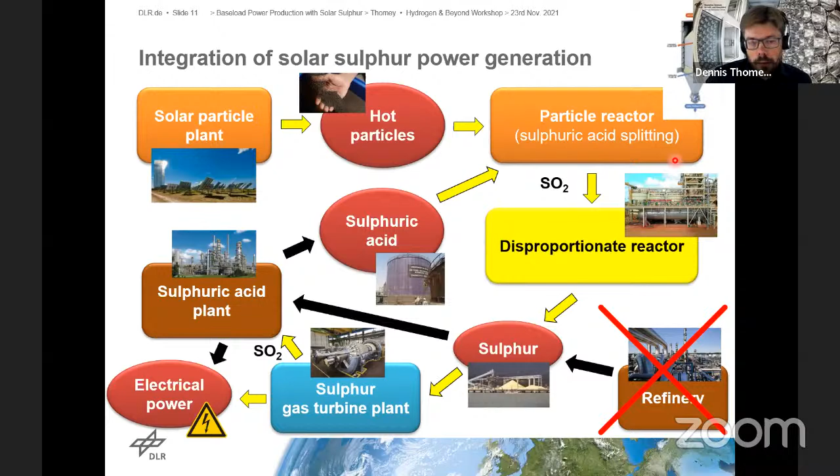And now we suggest to introduce the solar particle technology here to decompose or recycle the sulfuric acid, splitting it, then further disproportionate the SO2 to come to the elemental sulfur, so that we would recycle the sulfur throughout the process and would not need fossil sources anymore. As an additional feature in our project, we suggest to use gas turbines to further increase the efficiency of sulfuric acid plants, burn the sulfur here and drive the gas turbine with the exhaust.

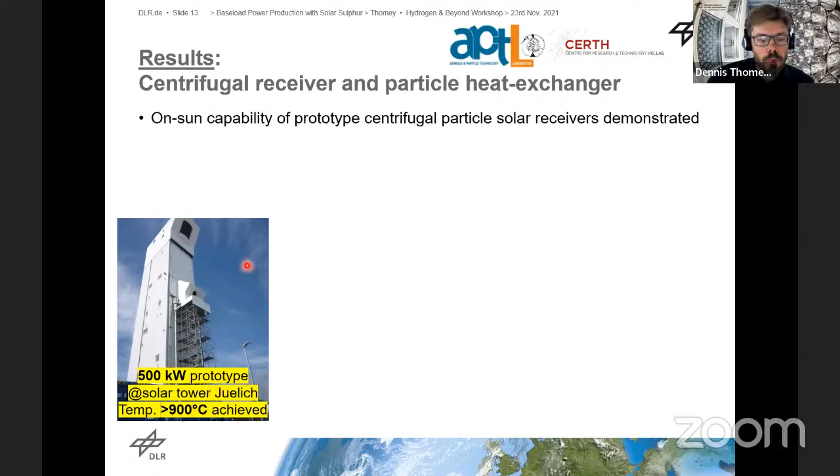So I mentioned already the European project Pegasus, which was recently completed this year. I was coordinating this project as a representative of DLR, and we had partners from Greece, Germany, Poland, Italy, and Israel. And the main results are, first of all, we further developed the centrifugal receiver technology. There was a 500 kilowatt prototype on our solar tower in Jülich in Germany, where particle temperatures of more than 900 degrees were achieved. And in Pegasus, we developed another slightly smaller prototype in the 300 kilowatt range for the solar simulator Synlight in Jülich.

And here we could show that efficiencies in excess of 80% are possible. So this is experimentally proven. Plus, we see a potential of more than 90% in our validated simulations. And also we performed an integrated test in the Synlight. We had transport containers to transport the hot particles to a particle heat exchanger and demonstrate that we can heat a fluid with these particles. And this particle heat exchanger we also operated in our lab. It was a shell and tube system with a moving particle bed.

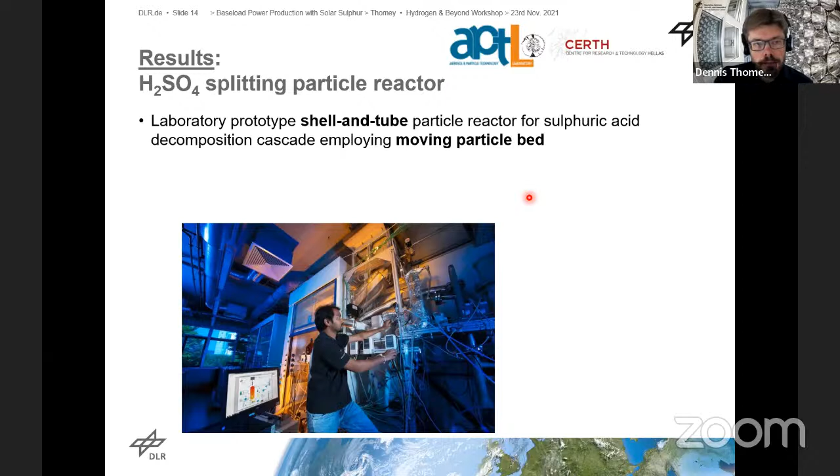And in the lab we had an electrical heater with 7 kilowatts. We reached particle temperatures of 870 Celsius here. The reactor had an efficiency of about 70% during the experiments, which are still ongoing. And we had a chemical conversion of the sulfuric acid of 44% on average and 86% at maximum. As a catalyst, we used iron oxide.

And our partner KIT from Karlsruhe in Germany developed a novel sulfur burner for application in gas turbines at elevated pressures of 15 bars. Just to explain, in sulfuric acid plants today, burners are used operating only at ambient pressure. Therefore, the off-gas can only be used for steam turbines.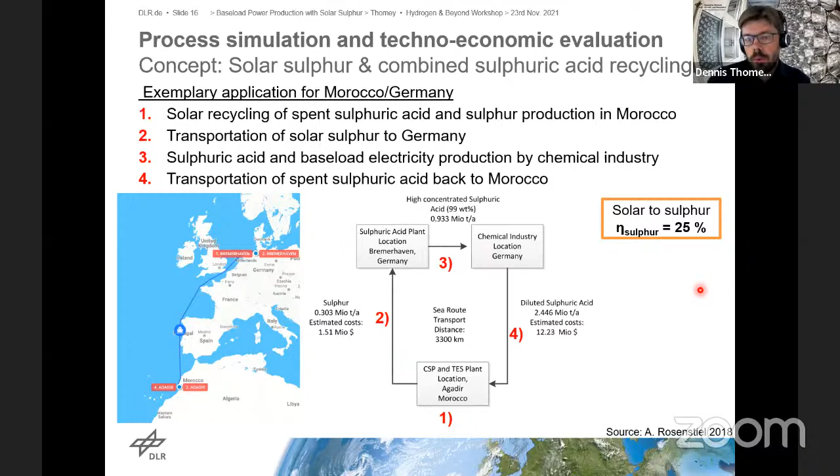The overall efficiency of this thermochemical process to make sulfur is in a range of 25%. This is close to other thermochemical cycles, for example in hydrogen production. And if you look at the electricity produced, we come to 8.8%. This is a very high value if you compare it to other power-to-X processes, for example. And in an economic study, we could show that at a CO2 price of about 130 euros per ton, this technology would be economically competitive.

This brings me to my conclusion. I showed you today that sulfur has a high thermochemical energy density. It can be very efficiently transported and stored as solid or liquid. The solar sulfur cycle allows for baseload power production, a complete decoupling of the solar source and the power production. And it has the potential to integrate in already existing sulfuric acid plants.

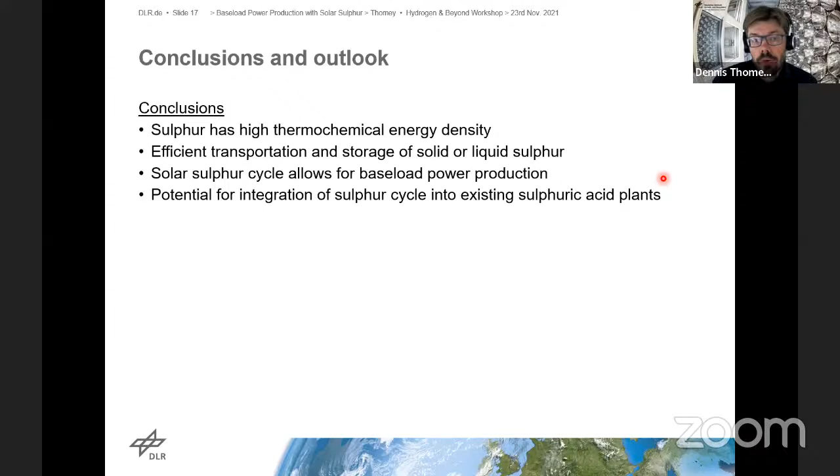Then I showed you the results of the European project Pegasus, where particle centrifugal receiver prototypes were constructed and tested on sun and also with simulated sun. We carried out integrated testing with the CentRec and the particle heat exchanger. We operated a particle reactor for sulfuric acid splitting, and partners of ours developed a prototype for sulfur combustion suitable for gas turbine application. Furthermore, we did process simulation and techno-economic studies.

As an outlook, currently we still have a national project in Germany on the sulfur cycle, where we also analyze the disproportionation reaction. And we are currently planning a follow-up of the Pegasus project in one of the upcoming European calls.

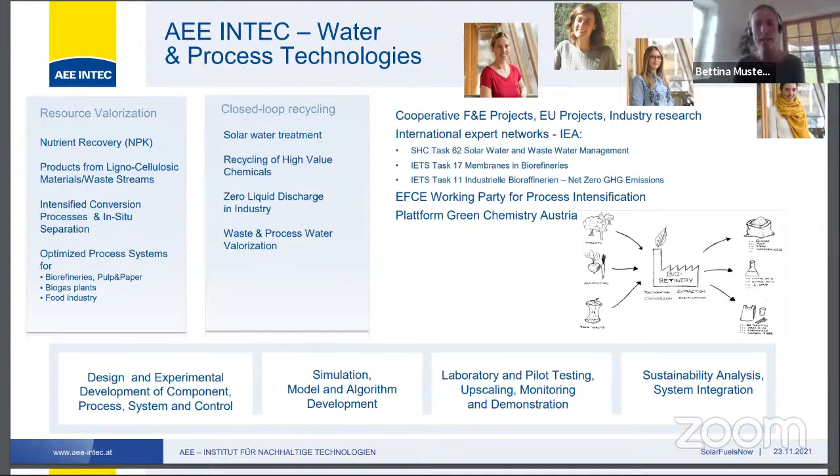If we go to the next slide, we see a little bit the research group we are working at here at AEE INTEC. AEE INTEC is a non-university research institute in Austria. We work on renewable energy technologies, a lot on energy grids, renewables in many different aspects, also for industry. And in my research group on water and process technologies, we have a strong focus on gathering valuables from waste streams and wastewater.

We mainly work in cooperative projects and are embedded in several international expert networks on IEA basis, and I've learned with interest about the upcoming hydrogen task before. We are also integrated in the working party of process intensification. So we try to use novel process engineering approaches to really leverage valuables from wastewater in a sustainable way. And we do that from design of components up to lab and pilot testing, but also system integration and sustainability analysis.

There are two main aspects that I would like to talk to you about today. The first one, if we go to the next slide, is ammonia separation via membrane distillation. That's why I think it links very well to solar: this could be easily driven by solar thermal energy because it requires very low temperature energy. So it could be waste heat, but it could also be low temperature solar. And the focus here is that we actually have this problem.

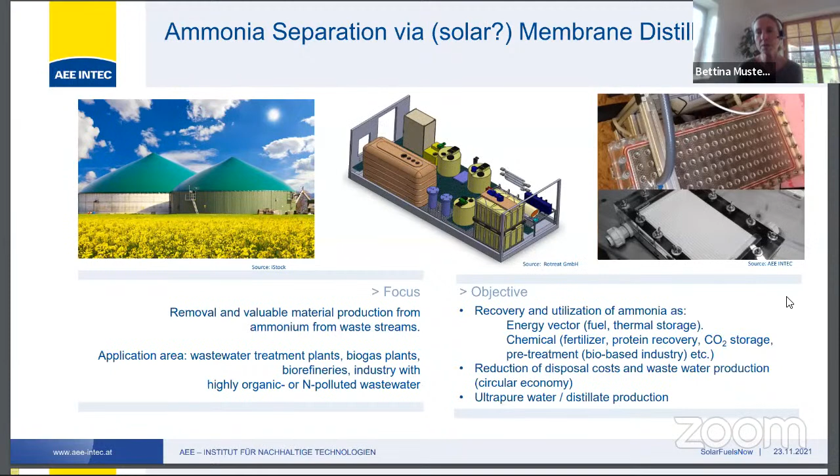The application areas where we have a potential here are of course wastewater treatment plants. We usually have high ammonia concentrations in digestates in biogas plants, in biorefineries, in food industry, etc. So we find across our industries quite a lot of nitrogen polluted streams where we could leverage this process. If we go to the next slide, I show you two different configurations of how we can separate ammonia from wastewater.

We have two different possibilities. In membrane distillation, we do what it literally says: we distill via a membrane. The driving force is a vapor pressure difference across the membrane. In the case of ammonia, we have a higher vapor pressure based on the free ammonia on the feed side. On the permeate side, we either bind the ammonia to an acidic stream, such as ammonium sulfate, or, based on a vacuum, we apply a certain vapor pressure difference and get ammonia in gaseous form or as ammonia water on the permeate side.

Only free ammonia can pass the membrane, so we need a feed stream at higher pH, or need to raise that pH. And then, as said, we have these two options. On the left-hand side, you see DCMD, direct contact MD. Here we get ammonia water, or with an acid, ammonium sulfate, or other products that could be used as fertilizers. On the right-hand side, you have vacuum membrane distillation, where ammonia is collected in gaseous form, so this could be directly an energy vector. We have been working in projects on both, which is shown on the next slide.

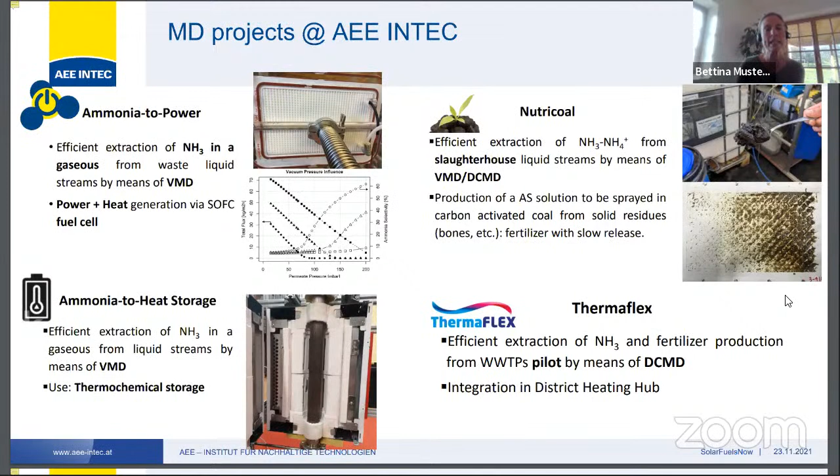So here, now on the left-hand side, rather the ones which link to ammonia in the gas form. And one of those that I would like to put up front today a bit is ammonia to power, this project, where on the next slide I show you more in detail the concept.

When we go to the next slide, please, we looked at different influencing parameters in this work. So how can we actually optimize this vacuum membrane distillation process to get very high concentrated ammonia gas streams? And we did find out a lot of influencing parameters. One, of course, is the ammonia concentration on the feed side, because it adds to this vapor pressure difference and the driving force. Vacuum pressure is, of course, influencing, but also temperature.

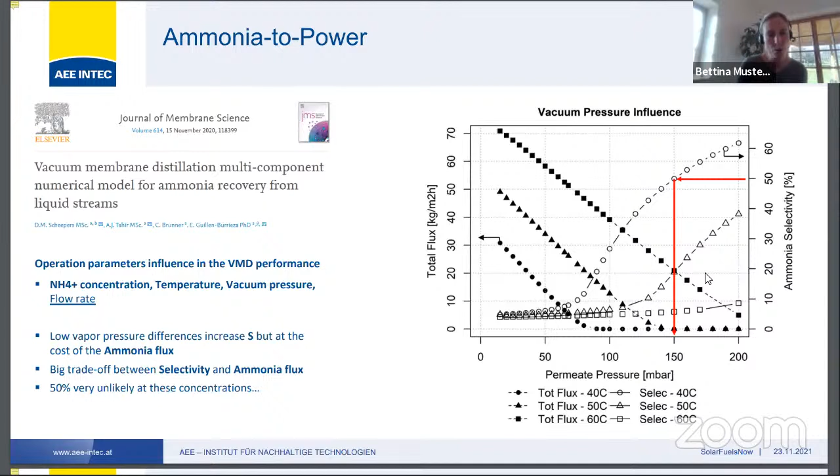However, still in this vacuum membrane distillation, we always have a trade-off: how much ammonia flux do we get through, and on the other hand, how high is actually the concentration of our gaseous product? And if we go a step further, we also found out here that we can even increase this with new strategies.

So we actually found a way of how we can decouple the water and the ammonia flux. We're now in next projects looking also at more functionalized membranes that could even enhance the performance. And it also has to do a lot with really optimizing the temperature of the operation and these operating parameters. And of course, we also have to ask ourselves the question, what are the real SOFC requirements?

So far, we are cooperating with AVL here as an industrial player. And there are now tests being done on their SOFC stacks to really find out, is it actually 50% ammonia concentration, or what's the ideal concentration range here? And it is very important in future to look at stable performances.

And we've partly proven that already this year, where I would like to show you now a few results, however, in the direct contact mode. So not yet in the VMD mode, but in the direct contact mode. And just to give you an idea of how this can really work, I show you now some direct contact mode results, which we would like to transfer then to the vacuum mode for ammonia gas separation.

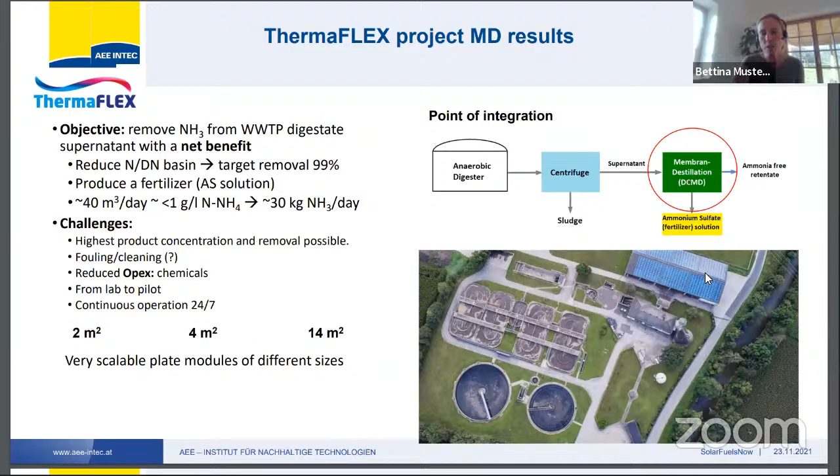And the interesting thing for really solar thermal, low temperature energy is that this process now, as we run it, runs at 38 degrees temperature. So this is really nothing in terms of the difference of other temperatures. Of course, the problem is also it's a membrane. How does it foul? How stable is the performance?

And here on the next slide, I can assure you that we did now already work in a pilot plant over the past year with 14 square meter membrane area. And we could show that, let's say, we have this module installed in July, and up to now, we don't see any performance degradation. We can actually remove 99% of ammonia. We recover 95% of the ammonia on the permeate side, so there are a few losses over the system.

We have a very low ammonia concentration in the effluent, so this is also interesting in case this water should later go back as, let's say, freshwater use, and we can work really stable. And I think this is very important, specifically for such a membrane process, because we even stopped in between. We had shutdowns because of a pre-filtration problem, but not of the membrane itself. And the system, as I said, so far never showed any performance deterioration.

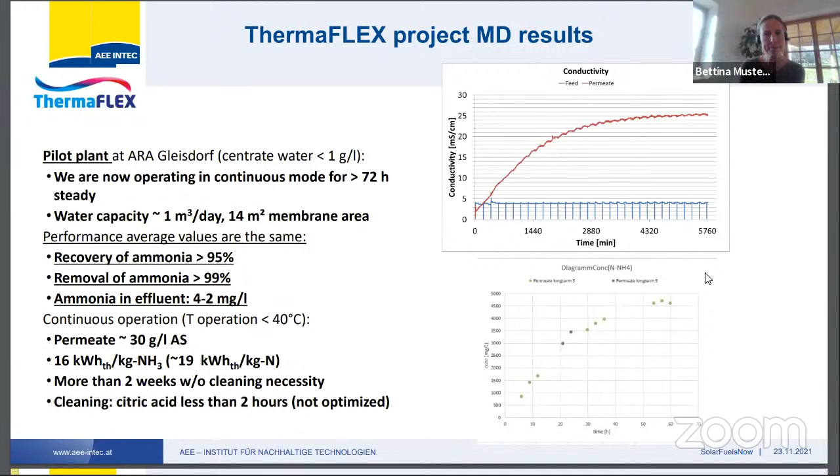If we now would apply similar things, and this is what we aim at in the next year, to really work in these new operation modes also for the vacuum membrane distillation. We already predicted some business cases, and these are summarized in the next slides. So if we would now say, okay, we take this concept as we have it now for the direct contact, and we transfer the optimization parameters we found out last year to the ammonia fuel generation, we strongly believe that we could really reach this 50% ammonia in our gaseous product stream.

And then we did some calculations on when such a system would pay off. And of course, we have to be obvious about the fact that in wastewater treatment plants, we do have a lot of ammonia, but again, this is not something that's available in megawatt scale. So these are rather maybe 10 to 50, maybe 100 kilowatt SOFC systems. So it's really more for the localized production and to help really on these local waste treatment problems.

And what we can see here is that we have, with estimative costs on how this could develop, payback periods of 5 to 7 years, also depending, of course, on lifetime of the systems. But however, in this scenario, we were presuming, because of these very low temperatures that we need, that thermal energy is freely available. So this is also now important for the solar side. I think such processes, if we go for low temperature solar thermal, this solar thermal energy would almost have to be available for free in order to make such systems economic.

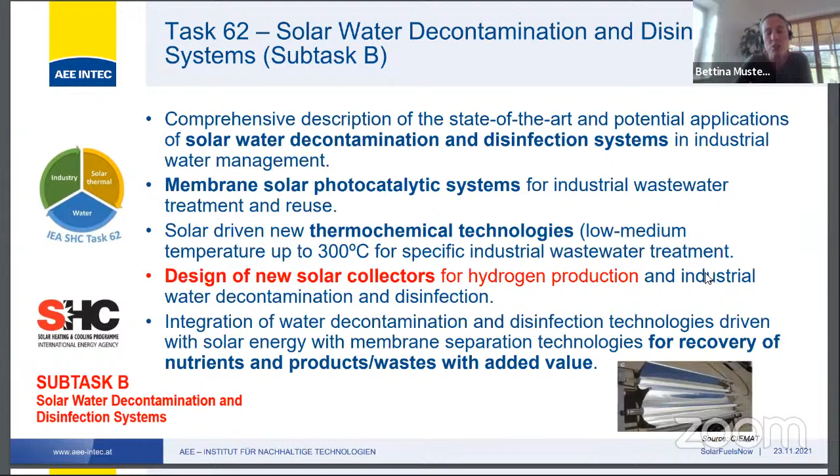And my last minutes I would like to spend on a second topic that we are also working at in our research group, and this is also embedded in IEA Task 62. In IEA Task 62, in the solar heating and cooling program, we work on solar-driven wastewater treatment. And one of these aspects is also new photocatalytic or photoelectrochemical hydrogen production. Here, as I show on the next slide, the core expert is from CIEMAT, and they are already working on this combination of photocatalytic wastewater treatment and combined hydrogen production.

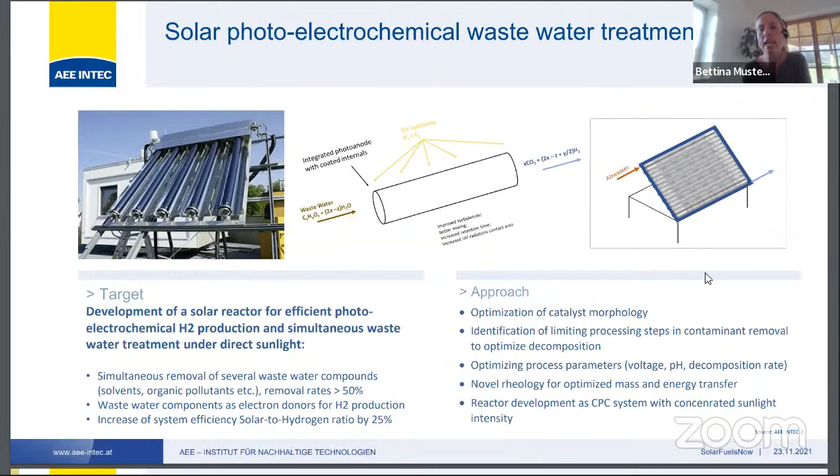And on the next slide, we have here a new similar approach in a national project where we work on solar photoelectrochemical wastewater treatment. And the point here is that we can combine the wastewater treatment, so the oxidation of pollutants, with the production of hydrogen in solar photoelectrochemical processes. In the next slides, I show you a few details. So the idea of coupling wastewater treatment with hydrogen production is not absolutely new.

There are several studies around. The wastewater components act as electron donors and can actually increase the efficiency. And there are available studies that talk about solar to hydrogen ratios of 5 to 15% that can be reached via this coupling.

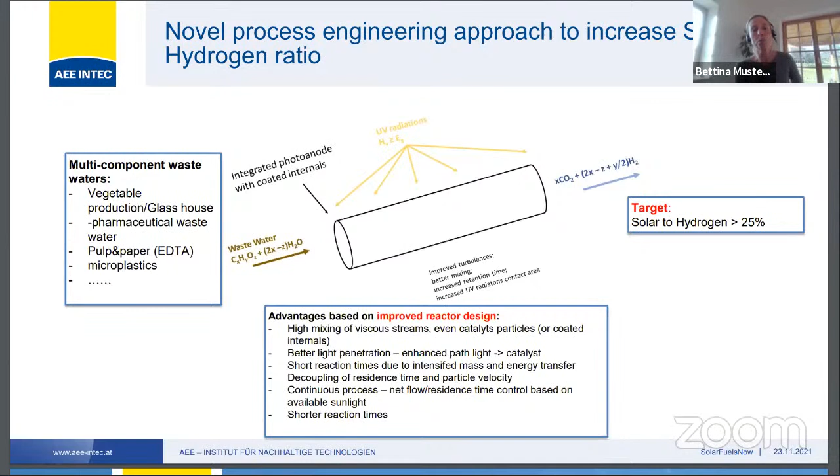And our approach in the project that we will just now start at the Institute, if you go to the next slide, please, is that we actually work on multi-component wastewater. So on the one hand, we will be working on wastewaters from vegetable production, where we have pesticides in. We will be working with pharmaceutical wastewaters, with wastewaters from the pulp and paper industry, and there especially with the focus on EDTA removal. And with these multi-component wastewaters, really try to make a novel PEC system to produce hydrogen. And our target is really to reach higher than 25% of solar to hydrogen ratio.

And how do we want to realize this? Here, our expertise is less the catalyst. This is linked to the partners. But our expertise is to really bring in a novel process engineering approach. So to really develop a CPC concentrated system, and via a new rheology in the absorber tube, enable very high mixing of viscous streams.

Then we can have a better light penetration and an enhanced path of the light to the catalyst, shorter reaction times because we have an intensified mass and energy transfer, and because we can decouple particle velocity from the net flow velocity, we will be able to tune the net flow velocity according to solar light. And this will allow us to control the reaction residence time based on the available light.